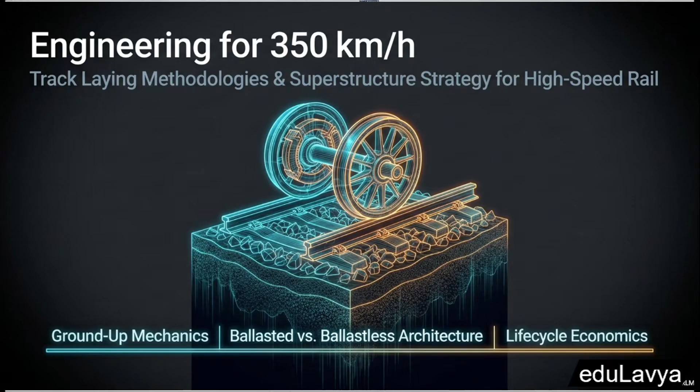Sure, the train itself is what catches the eye. But the actual star of the show here is the complex track system totally buried beneath the surface. To safely absorb the massive dynamic loads and intense vibrations of a train flying by at 350 kilometers per hour, engineers literally have to treat the entire track, from the deep subsoil through the protection layers, all the way up to the sleepers, as one massive unified system.

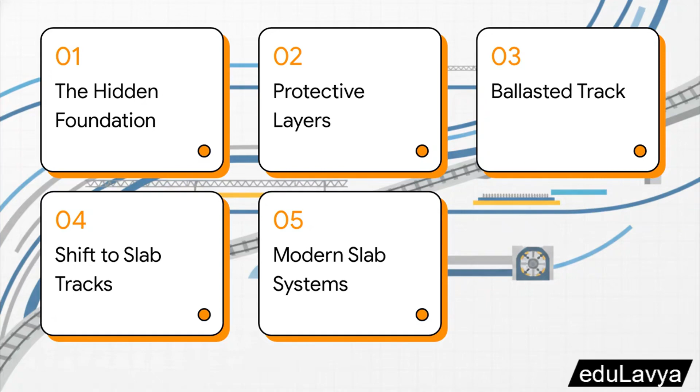So, here's our roadmap for today. We're going to take a bottom-up approach. We'll start with the hidden foundation, then look at protective layers and geotextiles, move up into engineering the traditional ballasted track, look at the big shift towards slab tracks, and finally wrap up with modern slab track systems.

Part 1. The hidden foundation, looking at the subgrade and sub-ballast. Let's start deep in the dirt. Now, you might be thinking, hey, high-speed passenger trains usually have axle loads under 18 tons. That's relatively light, right? The foundation shouldn't be a huge deal. Well, actually, any weakness in that subgrade is pretty much guaranteed to mess up the strict track geometry above it. A weak foundation basically guarantees track failure down the line.

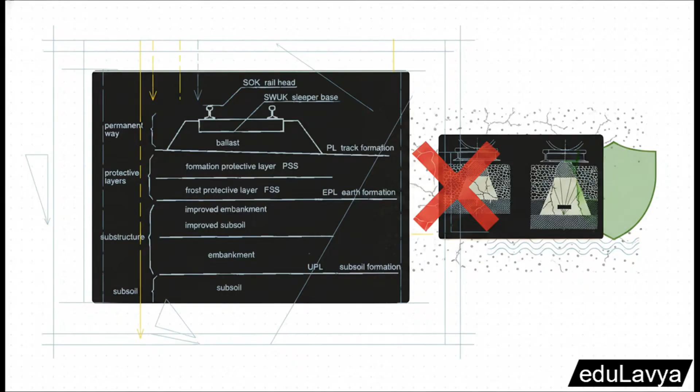Look at how the pressure distribution fundamentally changes the second you add a protective layer. Without it, that force transmission area is dangerously narrow. The pressure on the soil spikes, and you risk massive shear failure, plastic deformation, basically a dangerous disruption of the whole track geometry. But when you add that sub-ballast protective layer, it spreads the load outward like a giant shield. It drastically reduces the stress on that sensitive subsoil.

Moving on to Part 2, protective layers and geotextiles. To manage all those extreme pressures we just talked about and protect the earth formation underneath, engineers bring in the absolute unsung heroes of rail infrastructure. Enter geotextiles. These are inserted right between the underlying soil and the protective layers. Now, they do a lot. They provide vital separation, reinforcement, and drainage, but their absolute most crucial job?

Filtration. Think of a geotextile like a highly specialized heavy-duty coffee filter. It stops fine mud and soil particles from pumping up into the clean track ballast above it while still letting water drain right through. They are absolutely essential for making sure the track maintains its required bearing capacity over its 20-plus-year lifespan.

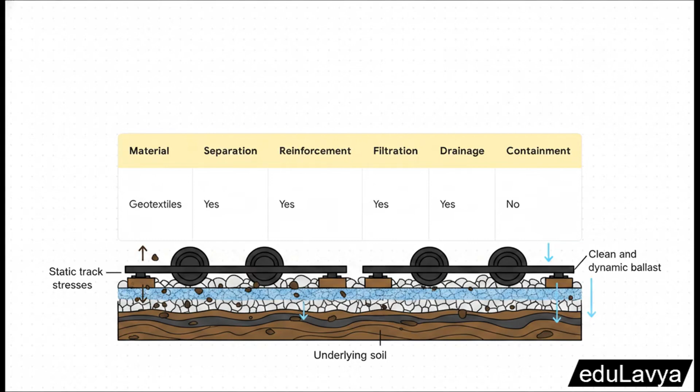All right, Part 3, engineering the ballasted track. Moving up from the subgrade, we hit the traditional gold standard. This is the backbone used on roughly 90% of high-speed lines across Europe. So what exactly is ballast? Well, spoiler alert, it is definitely not just random gravel scooped off the side of the road.

For high-speed lines, it has to be highly specific, incredibly hard rock, almost exclusively granite or basalt. It needs massive resistance to attrition, so it doesn't just grind down into dust under all that intense vibration. This carefully sized, crushed stone creates a stable, perfectly elastic bed that distributes the load, drains rainwater instantly, and holds the track geometry exactly where it needs to be.

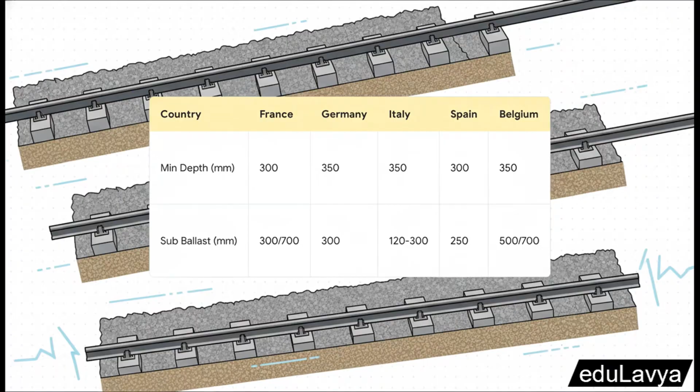And the engineering consensus across Europe is actually remarkably unified on this. From France to Germany to Spain, high-speed lines universally demand a strict minimum ballast depth of 300 to 350 millimeters. If you want to safely handle trains pushing past 300 kilometers per hour, this deep, highly specific rock bed is completely non-negotiable.

And there's hard data to back this up. Extensive trials at the FAST facility over in Pueblo, USA, proved exactly why these specs matter so much. They discovered that right at 300 millimeters of ballast depth is the absolute sweet spot. That depth requires the least amount of track geometry correction over time. It literally outperforms thinner 150 millimeter beds and surprisingly even thicker 450 millimeter beds.

You combine that 300 millimeter ballast with a 150 millimeter bituminous subballast layer, strictly use granite or basalt, and widen the shoulder ballast up to 700 millimeters, and boom, you've got a track that can handle some serious speed.

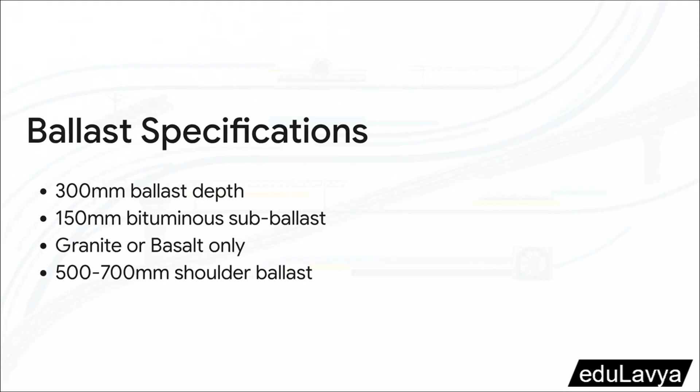Which brings us to Part 4. The shift to slab tracks. Now here's where we hit a major engineering plot twist. Traditional ballasted tracks are amazing, but they definitely have their limits, especially when we're talking about maintenance and tight space constraints, like running high-speed trains through underground tunnels. And that limitation? That's exactly what drove the engineering world to develop ballastless or slab tracks.

The big engineering leap here really boils down to elasticity versus rigidity. With a ballasted track, the crushed rock gives you elasticity. It allows for up to 2 centimeters of settlement over a 10-meter stretch, which is totally fine because machinery can just come in later and tamp the stones back into place. Because of that flexibility, you only need to secure the substructure about half a meter deep.

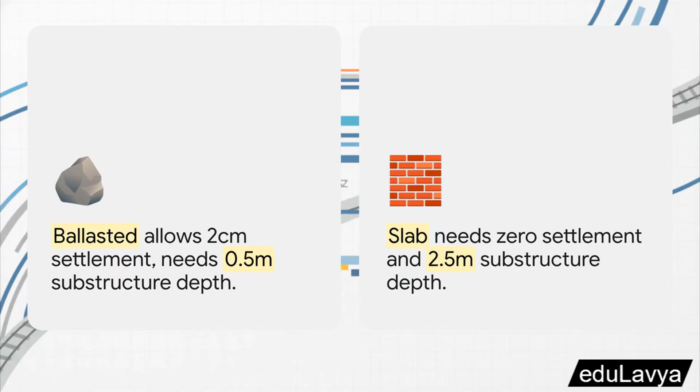But the second you replace those elastic rocks with rigid concrete in a slab track, the tolerance for settlement becomes virtually zero. You can't just easily adjust a solid block of concrete. So your earthwork substructure has to be completely flawless, secured a massive 2.5 meters deep to prevent literally any movement whatsoever.

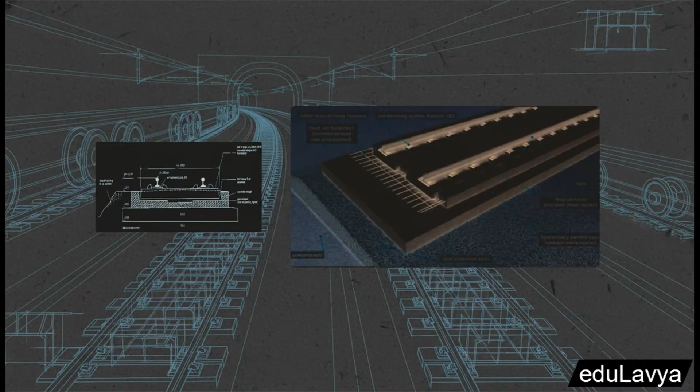And finally, Part 5. Modern slab track systems. Let's look at how engineers actually pull off these zero-settlement rigid concrete lines, using some of the most advanced construction methods out there. The Rheda 2000 system is a textbook example of this. Originating in Germany, this is actually the world's most popular slab track system.

What it does is use modified twin-block sleepers that are cast directly into a monolithic concrete slab in one single pour, no gaps whatsoever. That design gives it an incredibly low overall height, which makes it an absolute game-changer for threading high-speed lines through tight tunnels.

Alternatively, you have the SATO design, which takes a totally different material approach. It's a bit more expensive, but it's highly effective. It uses these unique Y-shaped steel sleepers. Engineers weld these sleepers to a flat steel strip using tie bolts, and then the entire matrix gets securely embedded right into an asphalt-bearing layer. That locks the sleepers solidly in both the horizontal and vertical directions.

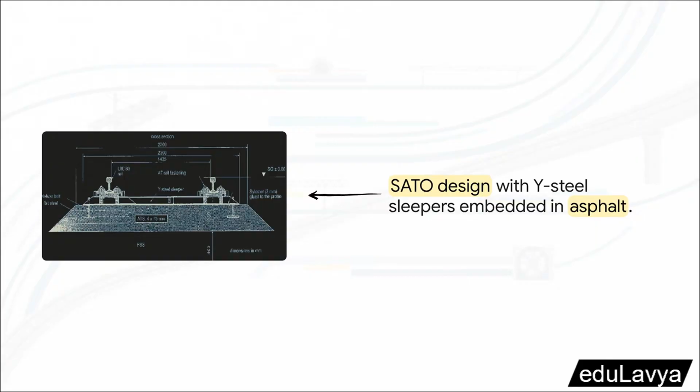And we can't forget the Bogl system. Instead of pouring concrete out on the site, this design relies on massive, high-tech, prefabricated steel fiber concrete plates. We're talking plates that are 20 centimeters thick and 6.5 meters long. Because they are manufactured under incredibly strict factory conditions, the track positioning is perfectly exact before the materials ever even arrive at the construction site.

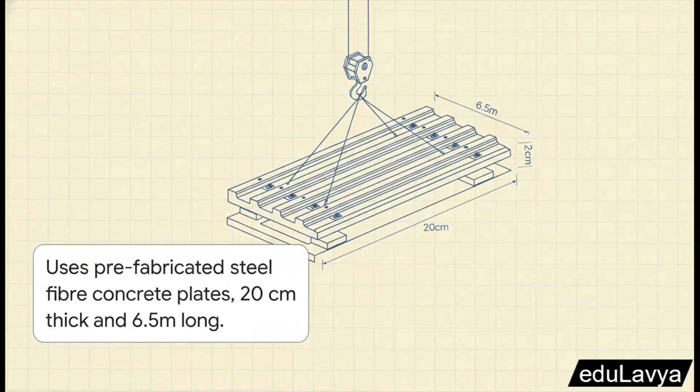So here's the thought for you. The next time you settle into your seat on a high-speed train zooming smoothly across the countryside at 300 kilometers per hour, I want you to ask yourself, what is actually under me right now? Are you riding on a perfectly engineered, elastic bed of crushed basalt, carefully draining the rain away? Or are you soaring over a rigid, prefabricated, monolithic concrete slab anchored 2.5 meters deep into the earth?

You know, it completely changes how you experience the journey once you realize the sheer scale of monumental engineering hiding right beneath your seat.